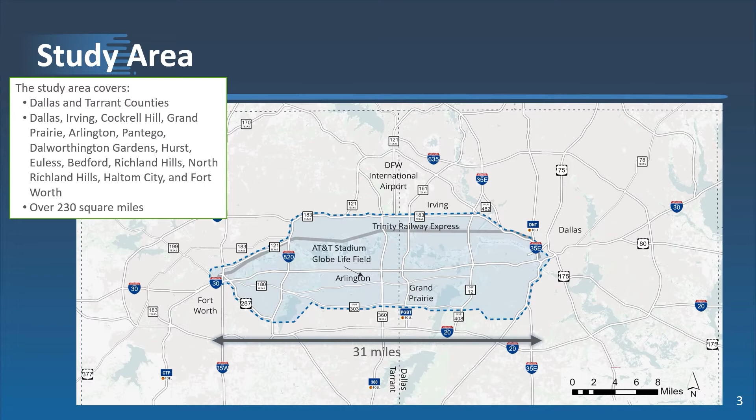The study area is located between State Highway 121 and State Highway 183 to the north, I-35 East to the east, downtown Fort Worth to the west, and U.S. Highway 287 and State Highway 303 to the south. That's over 230 square miles.

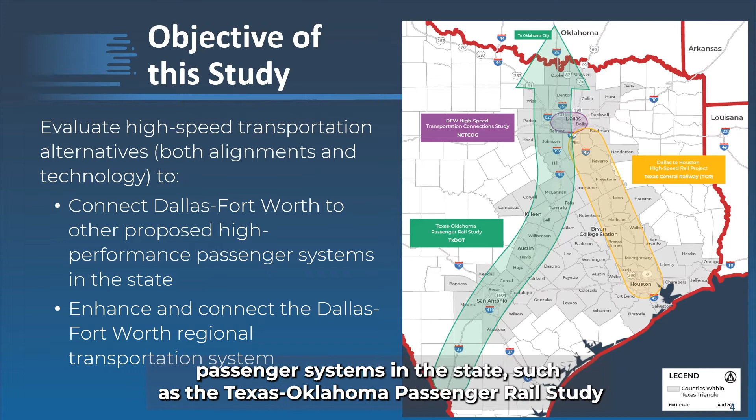Our primary objectives of this study are to evaluate high-speed transportation options between downtown Dallas and downtown Fort Worth. This includes analyzing both alignment and transportation mode options to connect Dallas-Fort Worth to other proposed high-performance passenger systems in the state, such as the Texas-Oklahoma passenger rail study following the I-35 corridor and the Dallas to Houston high-speed rail project, and to enhance and connect the DFW regional transportation system.

We are also seeking to obtain federal environmental approval of the viable alternative design and implement the project.

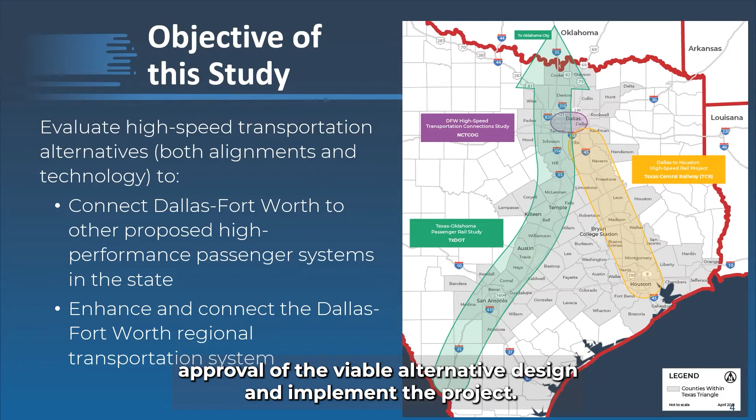The Texas Triangle megaregion is made up of several large metropolitan areas along the I-35, I-10, and I-45 corridors, including Dallas-Fort Worth, Houston, Austin, and San Antonio. With the state's 5 largest cities, this area is home to the majority of the state's population.

High-speed transportation is optimal for connecting these adjacent metropolitan areas within the megaregion due to distance and travel time needed for commercial air travel. With all of the expected growth in the Dallas-Fort Worth region and within the Texas Triangle, faster and more abundant travel choices are needed.

Additional travel choices will increase connectivity to, from, and within the North Texas region, and will lessen the demand on the region's roadways. This will also allow for more reliable travel times and better air quality.

The Dallas-Fort Worth High-Speed Transportation Connection Study is divided into 2 phases. The first phase analyzed all reasonable alternatives for alignments and travel technologies. The second phase will include an engineering and environmental analysis as prescribed by the National Environmental Policy Act. This consists of conceptual and preliminary engineering tasks and public engagement events. As always, questions and comments are welcome throughout the entire project.

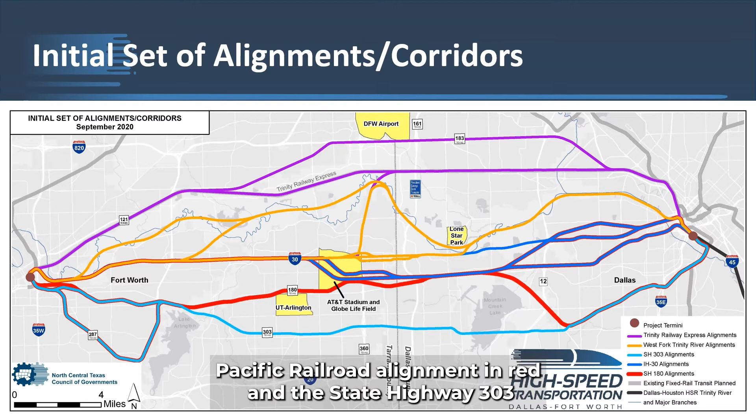The initial 43 distinct alignments and corridors evaluated in the first level of screening were grouped into 5 families of options. These 5 families are generally identified as the Trinity Railway Express alignments in purple, the Trinity River alignments in gold, the I-30 alignments in dark blue, the State Highway 180 alignments, which are very near the existing Union Pacific Railroad alignment, in red, and the State Highway 303 alignments in light blue.

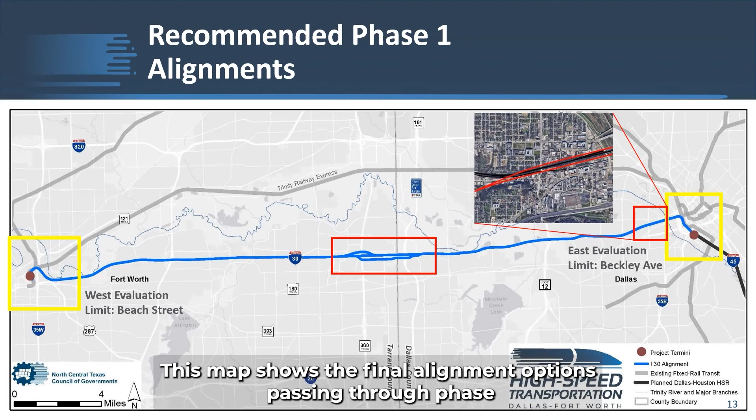This map shows the final alignment options passing through Phase 1 that were analyzed throughout the three-level screening process, focusing on an I-30 alignment option. I will pause for you to view the map.

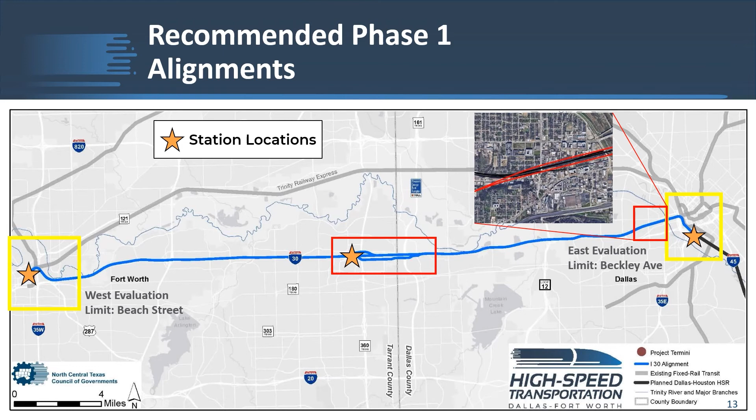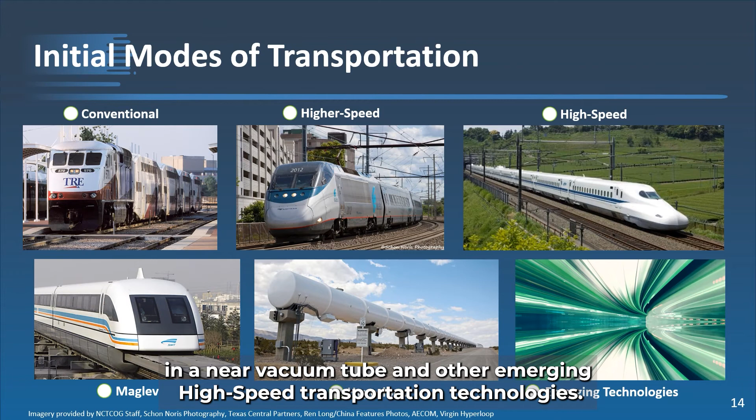Several high-speed transportation technologies and modes of travel were examined for their use to meet the region's travel needs. These included conventional passenger rail trains, higher speed trains, which are faster than conventional trains but slower than high-speed trains, high-speed rail trains, which are the passenger trains proposed for the Dallas to Houston system, magnetic levitation or maglev train technology, Hyperloop technology, which incorporates a passenger or cargo pod moving in a near vacuum tube, and other emerging high-speed transportation technologies. Throughout the Phase 1 screening process, we eliminated several modes in each level of screening.

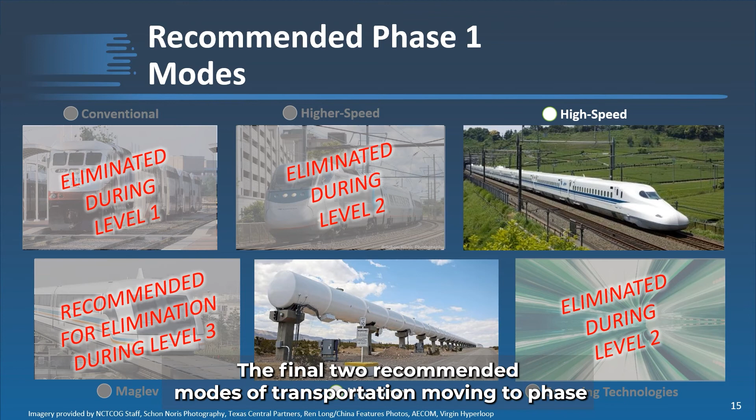The final two recommended modes of transportation moving to Phase 2 are high-speed rail and Hyperloop.

Our project team is wrapping up Phase 1 as we move forward with the recommendations approved by the Regional Transportation Council. We are hosting open houses in Fort Worth, Arlington, Grand Prairie, and Dallas before we initiate Phase 2. We anticipate Phase 2 to last approximately 2 years. During this process, we will draft an environmental document in accordance with NEPA, start preliminary engineering, draft financial and project management plans, and continue with public stakeholder and agency outreach.